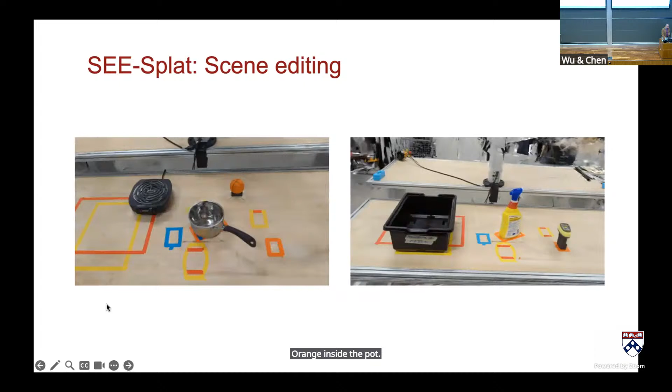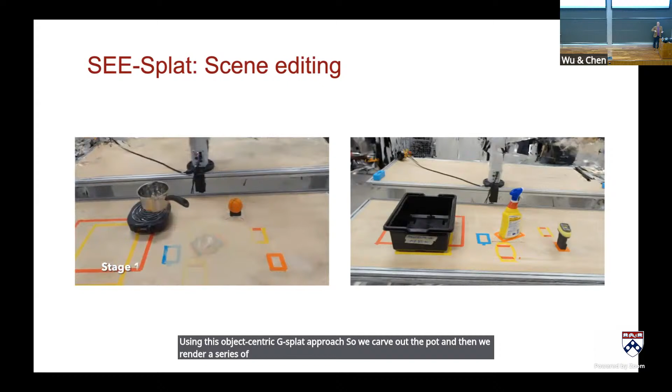So then we use this object segmentation capability to plan the motion in terms of pose trajectories for the object. If we have a language command like 'move the pot to the burner and then move the orange inside the pot,' we can do that using this object-centric gsplat approach. We carve out the pot, and render a series of SE3 transforms that take the pot to the burner. We also carve out the burner, since the language command specifies pot and burner as the object and destination. Then we carve out the orange, and render these 3D transforms of the orange going into the pot.

Now this is useful for multi-stage manipulation. There are two stages here: we move the pot to the burner, and then we move the orange to the pot. The only thing the robot has is the language—move the pot to the burner and the orange to the pot—and it has to make sense of that language through the map.

Now, if we didn't have an editable map, we move the pot to the burner, but the map doesn't know that. Suppose we don't have an editable map—the pot remains in the map where it was originally, but in the physical world the pot is now on the burner. What does the robot do? It doesn't know where the pot is, so it's going to move the orange to where the pot used to be, and that's the wrong answer.

So we need a kind of a digital twin. We need to update the state of the gsplat to match the state of the world as the robot is rearranging the objects in the world.

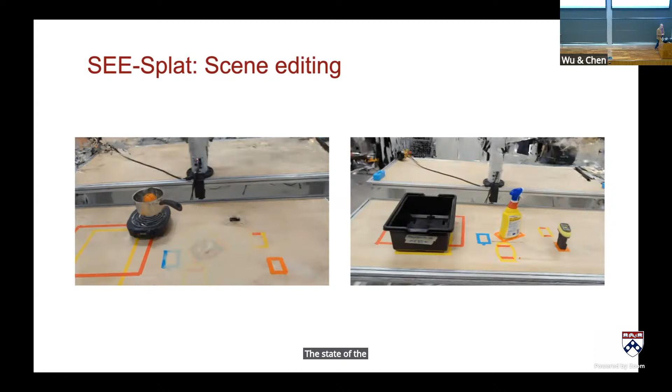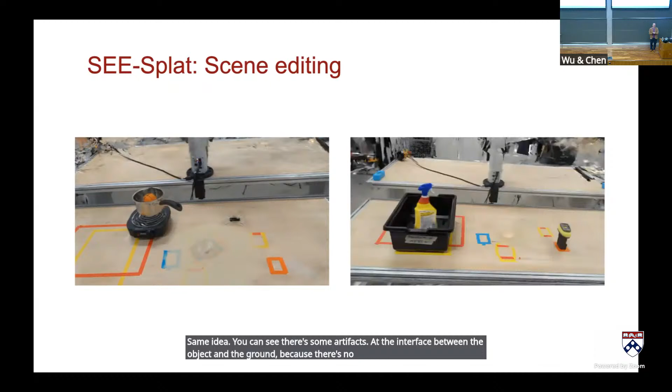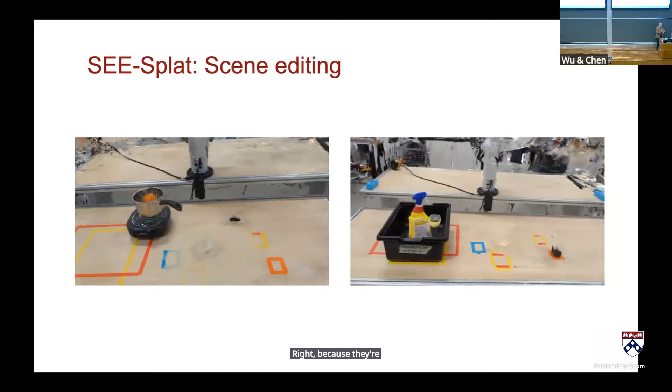This is a similar thing, but with a spray: move the spray to the bin and then move the battery next to the spray. You can see there's some artifacts at the interface between the object and the ground because there's no supervision in training the gsplat there. There's no data on what the appearance is between the bottom of the spray and the ground, because they're in contact. So we've tried to use some off-the-shelf tools to heal those visual scars, to do some in-painting, and they work okay. But essentially that's not the main feature here. The main feature is showing the bulk geometric motion of the multiple stages.

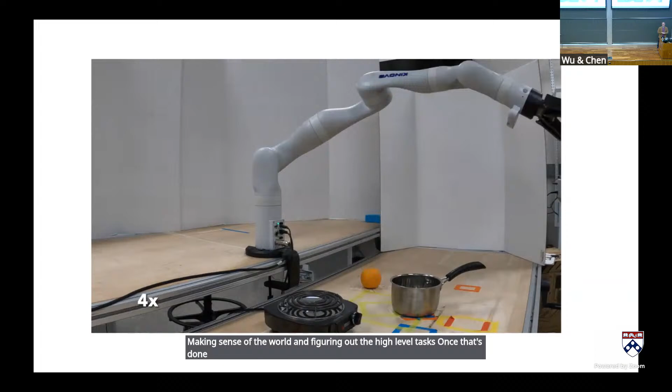So that's the idea, and I'm going to show you the whole thing working. At the end of the day you say, where's the robot? You didn't talk about a robot or robot motion planning. So for us, it's not about the robot or robot motion planning. It's about task planning, making sense of the world and figuring out the high-level tasks. Once that's done, the robot is just given waypoints, and then we use off-the-shelf tools to do motion planning. So here the robot's just executing the plan. All the intelligence is really baked into the plan.

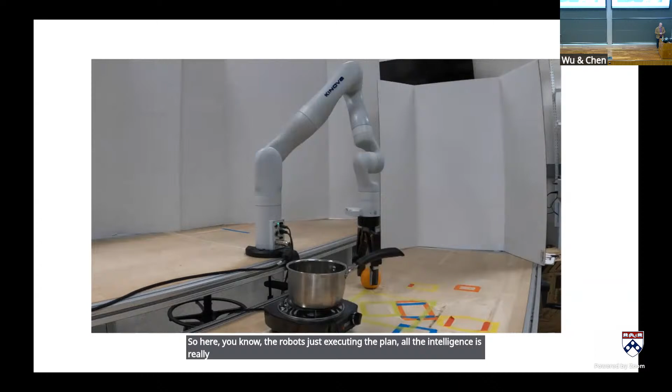So I talked about this idea of a digital twin and kind of keeping a record in your gsplat map of what's happening in the real world. Let's take that a little bit farther. So really what I'd love to do is have a physics simulatable gsplat. Wouldn't that be amazing? Something where you could really simulate the weight and the friction and the contact forces of a chair, of a bunny, of objects in the scene, of the robot itself as it's moving around in the scene. So this was the target of a work that we did quite a while ago, back in 2023.

It's called DANO, Dynamics Augmented Neural Object. And the idea was exactly this, to take, in this case it's a NeRF, because this was pre-gsplat - we can easily do the same thing with gsplats - you take an object-centric NeRF and you tag it with properties that would be required to simulate it in a physics simulator. And then we go ahead and simulate it in a physics simulator.

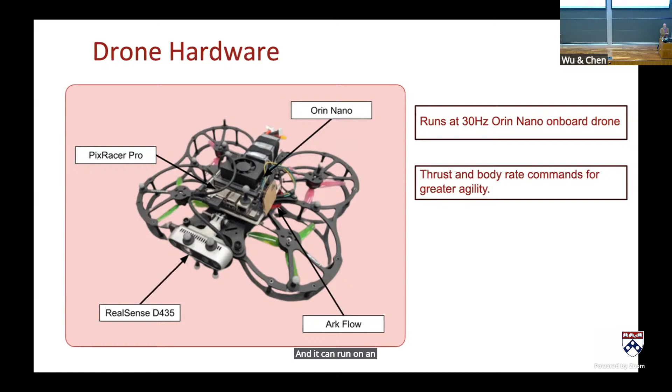We can put all of this, the neural network and the sensing, onto a drone. This is our own in-house drone, not the modal AI. It can run on an Orin Nano board at 30 hertz, so the forward pass inferences required for online control can run at 30 hertz.

I'm almost done, I know I'm out of time. We get zero-shot sim-to-real transfer, but it's more than that, we get really great robustness. This was surprising from an empirical point of view. We noticed how robust this was early on, so we said let's go wild: everyone in the lab, try to mess this thing up, mess up its visual field of view as much as you can. It doesn't seem to care. It knows how to cue into the objects that are similar to what it was trained on and drive its motion based on those objects.

So we tried wind gusts, mass changes of plus 30%, dimming the lights by 50%. This was a concern since it's trained to expect certain images, but it turns out to be quite robust to dim lighting too. We moved furniture items around and it doesn't seem to care, it can cue in on furniture that's still where it was during training and ignore the pieces that moved. I'm not claiming to know why or how, but this is just empirically what happens. Then there are dynamic distractors, which are my PhD students running around in the lab trying to mess things up. Okay, finally, last slide.

How do we now embed semantics? I think this is really exciting. We can get a drone, with all the compute and sensing on board, to navigate in a visual environment. Now, how can we get it to understand our commands?

This is unpublished work but looks promising. We're trying to use a trick with CLIP. What we do is at runtime, we take the language query that comes in, like 'fly to the microwave,' and the image stream at runtime, then take the CLIP similarity, and we get a heat map. Instead of an RGB image, we get a heat map image, which is a semantic relevance image.